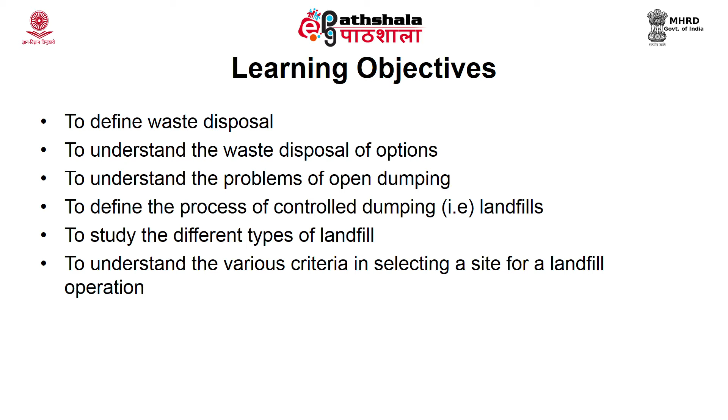As I told you earlier, disposal is the last step in the waste management plan. This is where the fate of solid waste ends. Ultimately, any solid waste generated ends in a disposal site, either directly disposed into the landfill after generation from the collection site, or it undergoes treatment or processing, and later the residue left after treatment is taken to the disposal sites.

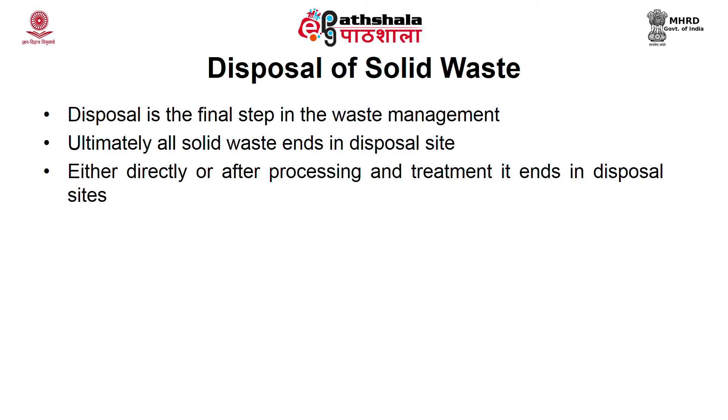In a country like India, we always practice open dumping. The waste generated from the collection area is taken up by waste collectors and then disposed of into an open area which does not have any protection. Protection in the sense that the environmental matrices are disturbed; it pollutes the water, soil, air and creates various other problems.

So in most developing and underdeveloped countries, solid waste is dumped in open land without any protection or environmental control. That sort of dumping is called unsafe dumping. Solid waste is also disposed of in water bodies. In recent times you can find a lot of problems with marine pollution, where a huge amount of plastics are disposed of and found in the oceans. Marine pollution is one important issue gaining a lot of attention.

Solid waste, as I told you, is also disposed of in water bodies. Whenever you visit a tourist place, you can see a lot of material littered and just thrown into the water bodies. So people also use these water bodies as a source or as a disposal site.

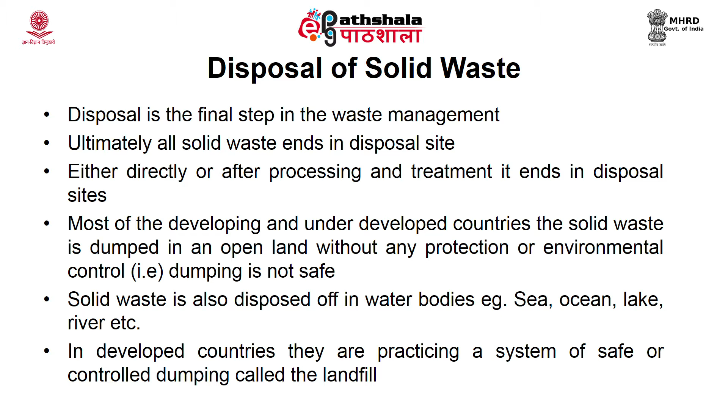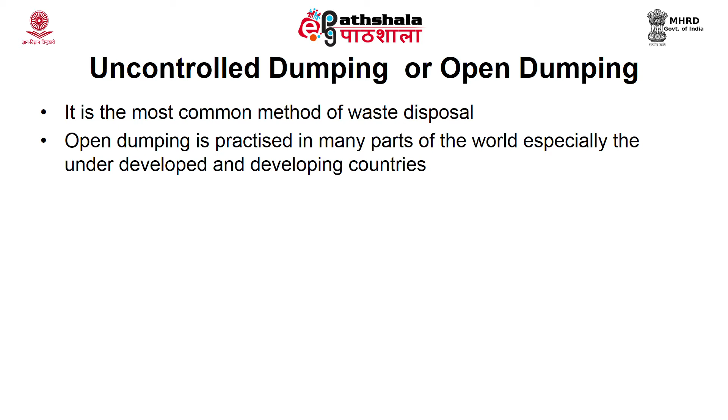On the other side, in developed countries, they practice a system of safe or controlled dumping, which is called a landfill. Uncontrolled dumping or open dumping is the most common method followed for waste disposal, practiced in many countries, mostly underdeveloped and developing countries. In this method, waste is dumped at a designated site or land without any environmental protection or control.

The waste disposed in open areas remains there for a long period of time and starts affecting the environment, and slowly it also affects the health of individuals. Due to the various problems associated with open dumping, landfills came into picture because they are considered a safe option where waste is contained with proper protection mechanisms, or in other words, contained by a barrier system, so that water, air and soil do not get polluted.

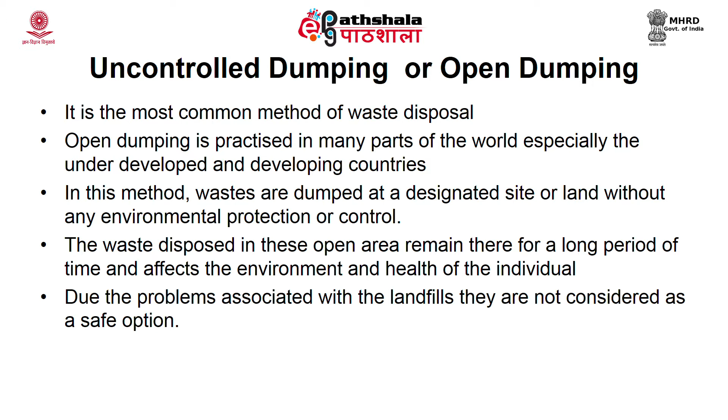Now let us look into the various problems associated with open dumping. First, it causes contamination to soil, water and air.

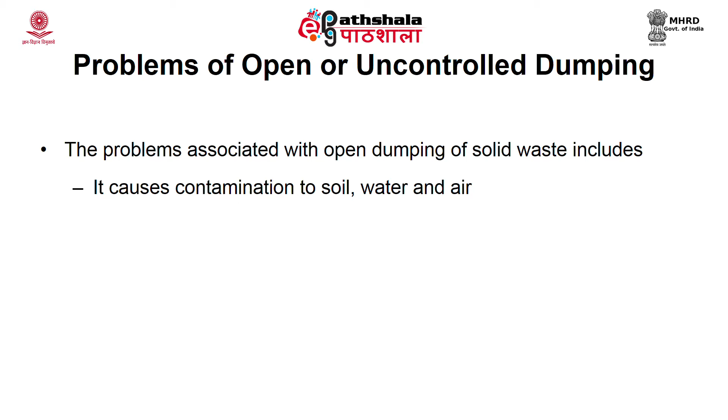During uncontrolled dumping, leachate, which is a watery liquid that oozes out of a material during degradation, percolates into the soil. When it percolates into the soil, the contaminants or pollutants enter it. These contaminants may or may not be toxic, and it also affects the microbial diversity of the soil and the vegetation of the area.

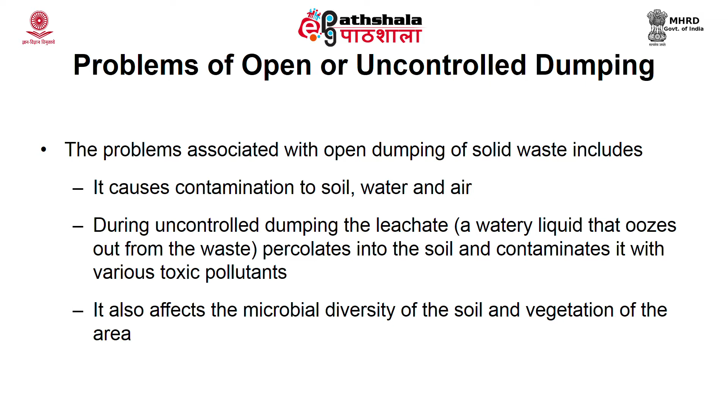Wherever you see these dump sites or dumping areas, you cannot find any vegetation. Hardly any vegetation is seen, and what is there is sparsely vegetated. Through the soil medium, the leachate further percolates and infiltrates, and finally reaches the groundwater, thereby contaminating it.

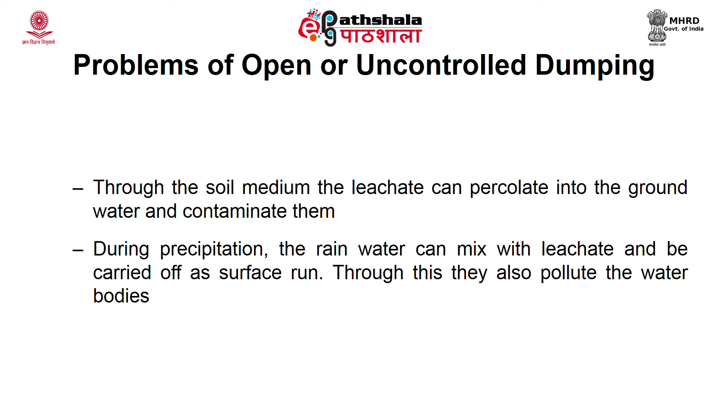Now when there is rainfall, what happens? The water reaches the surface and mixes with the leachate generated by the waste. Once it gets mixed, a surface runoff is created, and through this way it is discharged or enters into water bodies. So during precipitation, rainwater can mix with leachate and be carried off as surface runoff, polluting other surface water bodies.

The next problem generally faced is that these open dumps serve as breeding grounds for many disease-causing vectors. Since the waste has been piled up, you can find a lot of flies, mosquitoes and other rodents, which are the main carriers. They can cause malaria, dengue, and other diseases.

Even stray animals get into these waste piles and can also act as carriers. Stray animals can be dogs, pigs, cows and many more. They also act as carriers, and when they enter the dump sites and then come into the residential area, they bring the vectors along and spread diseases there.

Since the waste dumped in the open area does not have any cover or capping, it is carried off by the wind. When there is wind blowing, it carries all the loose materials from the waste pile and keeps spreading or travelling through long distances. It can come back to the residential area, or even sometimes get stuck to vehicles, the glass or front mirror of the vehicles, and also stick onto traffic signals.

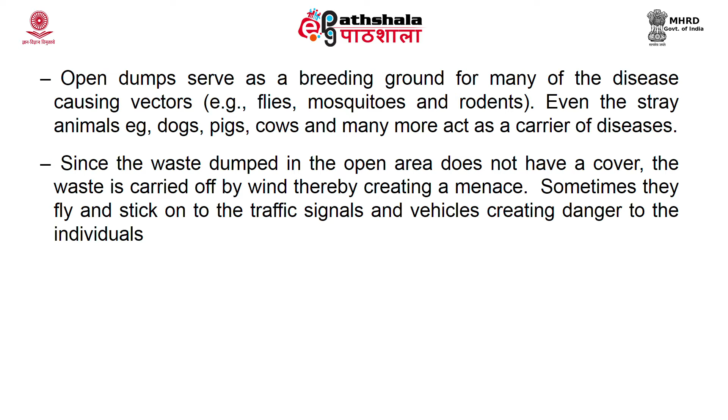Due to this, there are chances of accidents occurring, and it is dangerous for the individual. To recover metals from the waste pile, it is difficult for rag pickers, so what do they do? They light fire on these waste piles, and once it burns and gets converted into ash, they remove the valuable metals from that.

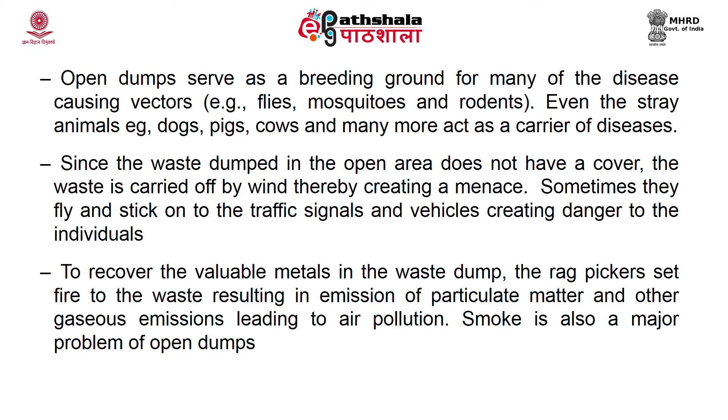Since they do that, it results in emission of particulate matter as well as gaseous pollutants. So to recover valuable metals in the waste dump, rag pickers set fire to the waste, resulting in emission of particulate matter and other gaseous pollutants, leading to air pollution. Smoke is also a major problem caused in open dumps due to the fire set by these people, so by this way also the air is being contaminated.

In addition to that, when the waste gets degraded, it also generates or releases a lot of gases like carbon dioxide, methane, and VOCs, that is volatile organic compounds, which also cause air pollution. So air pollution is also caused by emission of gaseous pollutants, for example carbon dioxide, methane, VOCs, etc., produced during waste degradation. The emission of greenhouse gases from these dump sites results in global warming.

The land where the waste is dumped undergoes continuous degradation, and at one point of time the land gets deteriorated and is of no further use.

The waste dumped in open dumps creates unpleasant odor. Whenever you cross by a waste dumping area, or even a vehicle collecting waste, you get that obnoxious smell which is very unpleasant. So such odor is also released from these areas.

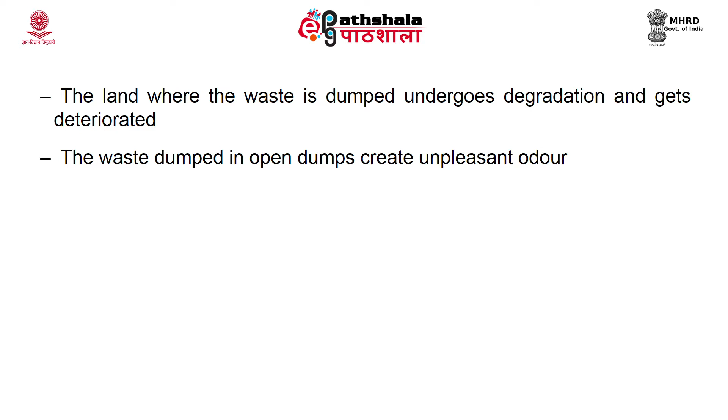Now, in general, if you see the aesthetics of the area, nobody would like to see an area where waste is being dumped, because you can find a lot of flies, mosquitoes, and animals moving around these dump sites. So it does not give a proper aesthetic look. These dump sites affect the aesthetic look of the area.

As I told you earlier, these waste dumps or piles attract a lot of insects, rodents, birds and animals. The contaminants present in these waste piles are toxic, which affects the species, and sometimes they also kill the insects, birds and animals. Through these insects, birds and animals, the toxic contaminants enter into the food chain and slowly reach human beings, causing a lot of health issues.

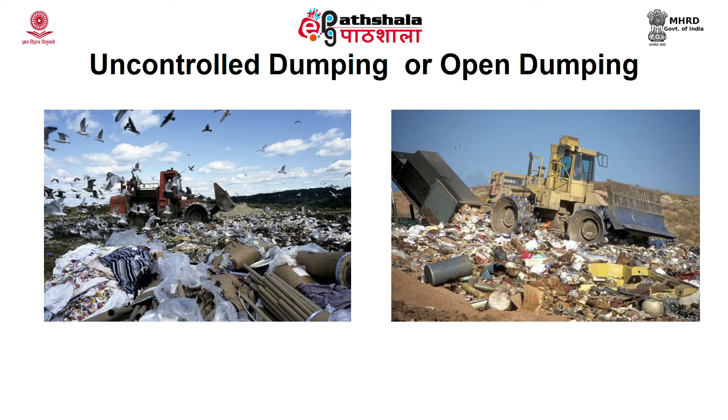This picture shows how in a dump site you can find a lot of birds sitting over these open dumps, and on the right side you can see how a lot of material is being dispersed into the open landfills.

So far we have discussed the various problems you face out of open dumping, that means the waste is just thrown off into open land. Now, with these problems, people thought we should have some sort of controlled dumping which should be safe for the environment as well as individual health. So with that, the concept of controlled dumping or landfilling originated.

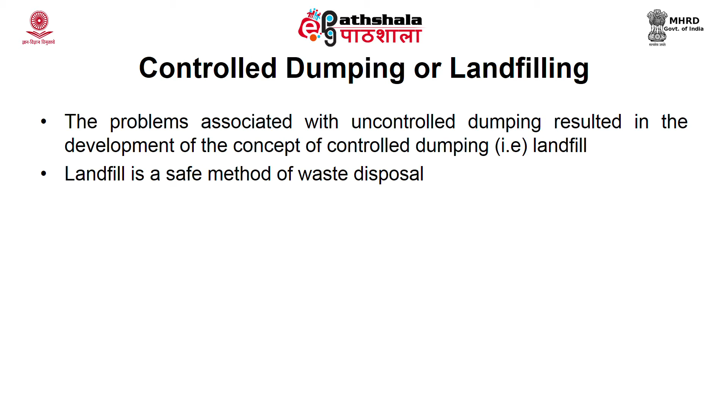The problems associated with uncontrolled dumping resulted in the development of the concept of controlled dumping, that is a landfill. Landfill is a safe method for waste disposal, defined as an engineered structure where waste can be contained in a safe manner. They are designed and operated to meet the standards laid by the government, in a way that protects the environment and health of people.

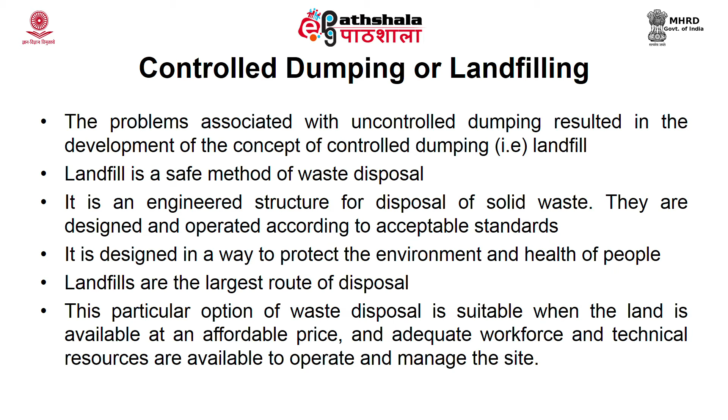They say landfill is the largest route of disposal. This option of waste disposal is suitable when land is available at an affordable price, when you have adequate workforce and technical resources. If all these conditions are there, then landfill will be the cheapest option.

Now, what are the different components of a landfill? As I told you, landfill is an engineered structure which has a lot of barrier systems, so that it contains the waste and does not allow the contaminants or pollutants to leach out from the landfill.

There are three major components of a landfill. One is a liner system, the other is the waste emplacement cells - emplacement means placing or loading the waste. The third one is a cover or cap, the final closure. When the landfill is full, it has to be closed, called landfill cover or capping.

The leachate collection system, groundwater monitoring system and methane gas monitoring system are for monitoring the landfill. The leachate collection is needed because during waste degradation, the leachate that comes out should be collected, otherwise the water gets accumulated and affects the site. So the leachate has to be collected out from the landfill site.

The groundwater monitoring system and methane gas monitoring system are for post closure. Post closure means once the landfill is done, with no further space to accommodate waste, you have to close or seal the landfill. After that, you have to keep monitoring it continuously for 5 to 10 years, so you can identify any leakage through these groundwater and methane gas monitoring systems.

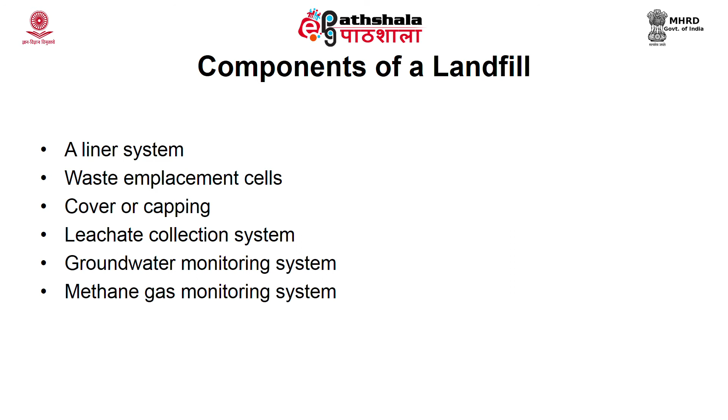The details of these components of a landfill we will discuss in the next module. This is an image of a landfill where you can see it is a well-engineered structure. You can find the barrier system both on the sides and at the bottom. You have a liner system, and the waste is placed in terms of cells, and once a cell is full, they move into the next cell.

They keep on doing it like that, and you can see how on top it is covered by a soil layer. You can find the groundwater monitoring system and leachate pump or collection system for collecting the leachate, so that it does not enter into the groundwater, and you also have a gas monitoring system. Now, this is how a landfill will look like.

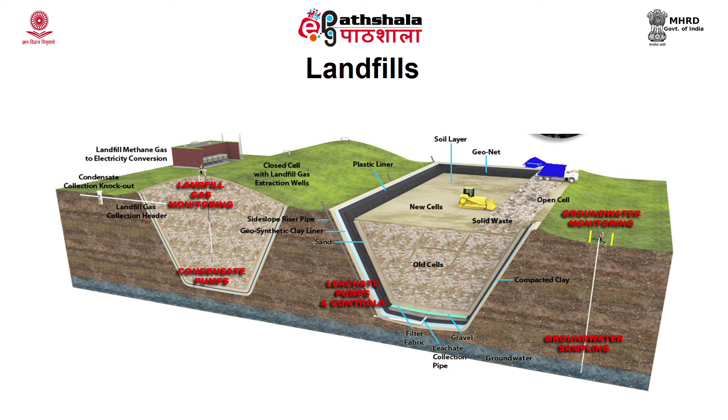So far we have discussed the open dumps and the landfills. Now we also have to look into the various criteria required for selecting a site for a landfill. Though it is an engineered structure where you contain the waste with a barrier system to protect the environment, still there are certain conditions to look into while selecting a site. The selection of a landfill site depends upon the following criteria.

One, the proximity of the site to the source of waste generation, the distance from the boundary of the site to residential area, agriculture, or urban site. This means the waste site should not be close to a residential area, agriculture area, or urban site. It should always be located on the outskirts of the city, away from the city. But though located on the outskirts, it should still be accessible, with proper road connectivity and good transport infrastructure.

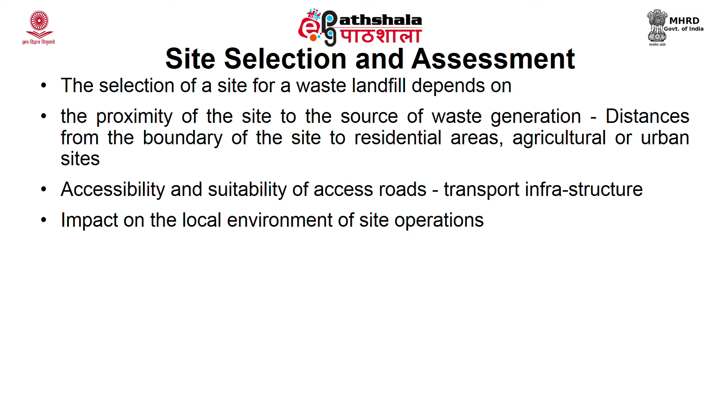Then the impact on the local environment. When you select or allocate a site for a landfill, you should understand and study how the landfill is going to affect the local environment around it.

Next, you should also consider the geological and hydrogeological stability of the site. These sites should not be located in a place where there are chances of frequent flooding, landslides, or avalanches. Such areas should be avoided.

The assessment of soil characteristics is very important, because it is through the soil that the leachate percolates. So you also have to focus on soil characteristics - the mineralogy, the permeability of the soil, and the grain size of the bedrock. If you understand all these things, it will help you decide, design, and structure the landfill so that it does not cause any pollution.

Then hydrological isolation. Hydrological isolation means it should be away from the water body, whether groundwater or surface water - the site should be isolated from these water bodies.

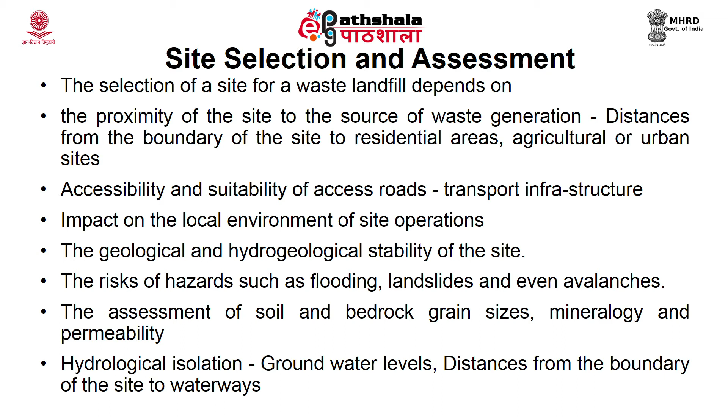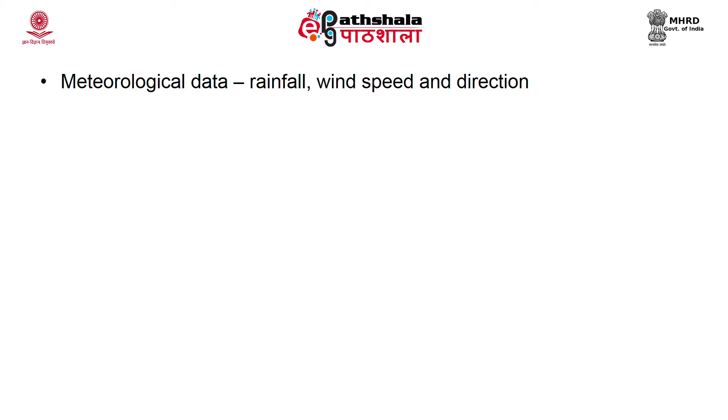Next, you should also consider the meteorological data - the amount of precipitation in that particular area, or the rainfall the place gets every year. You should also consider the wind speed, its direction, and other data.

When you select a site, you should also perform a topographic survey. This will help determine the slope, the elevation, and whether the terrain is rugged or undulated. So a topographical survey is undertaken to calculate the available void space and therefore the waste capacity of the site.

The background levels of water and air quality should also be assessed to find out the long-term impact of the site. For example, if you have this data, after some time when the landfill is closed, if you find unusual changes in air and water quality, this will help you find out whether there is any leakage or problem in the landfill site. So you should always assess water and air quality before selecting a site for the landfill.

Apart from this, these landfill sites should not be located near a UNESCO heritage site, a monument, national parks, or wildlife sanctuaries. You should also not select land with good agricultural productivity. Even barren land which can be brought back to productivity should be avoided when selecting a site for landfilling.

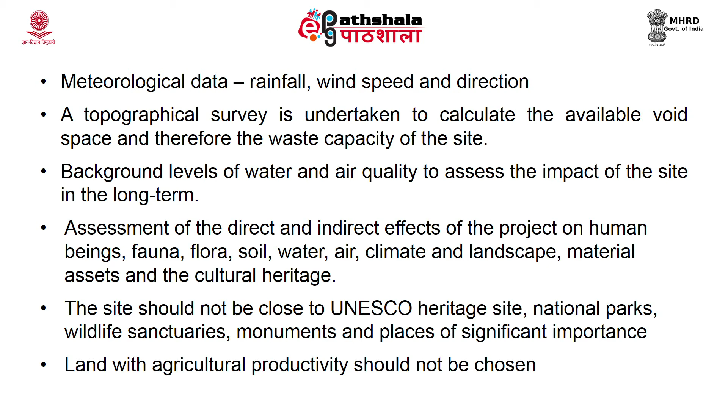Now let us look into the considerations for landfill. Since it is an engineering structure, you should consider the following criteria: one is site capacity, second is waste density, third is settlement, fourth is material requirement, fifth is drainage and operational practice. If you consider all these parameters, the construction of a landfill will be smooth.

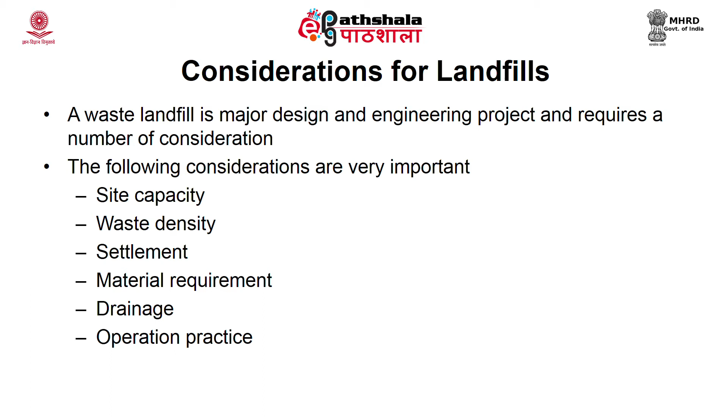Now, site capacity - this is one important factor when you design a landfill. Whenever you discuss capacity, the landfill should be able to accommodate waste for almost 30 to 50 years.

Now, this is called the design period. Within this period, when you calculate, the population projection and all should be considered, and the landfill site should be able to accommodate so much waste for 30 to 50 years.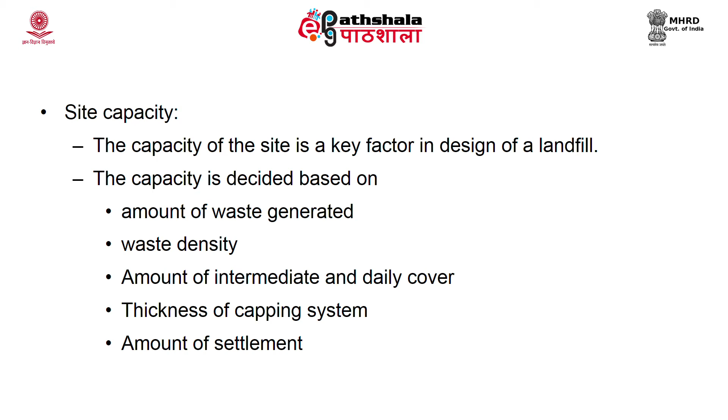The thickness of capping system and the amount of settlement also influences your site capacity. Settlement means due to compression, compaction and degradation, the volume of waste keeps reducing or it gets compacted. That is called the amount of settlement.

The next one is waste density. The density of the waste within the landfill will vary depending on the degree of pre-compaction of the waste before emplacement, variation in the components within the waste, extent of biodegradation, amount of daily and intermediate cover, and mass of overlying waste. Because the overlying waste, obviously, will be heavy, so it will press the waste lying below. The density also varies or is affected during the movement of trucks or lorries which carry the waste.

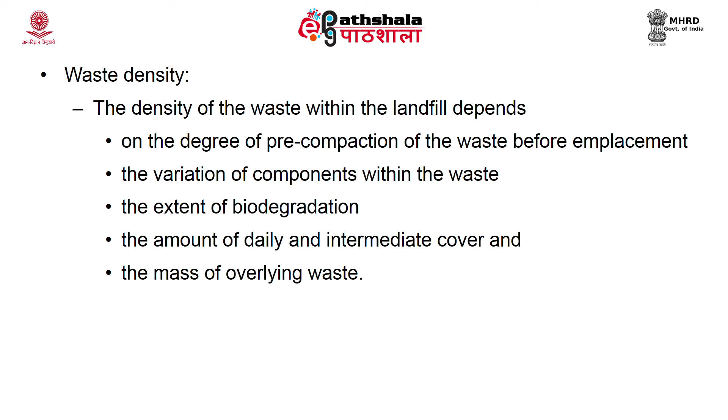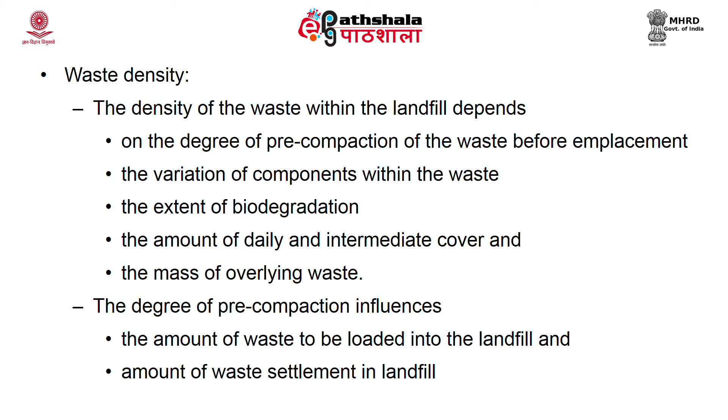The lorry is a heavy tired vehicle, and when it carries the waste it will be very heavy, and when it goes across these waste cells, obviously it will compact the waste and the volume gets reduced. So the degree of pre-compaction of the waste influences the amount of waste to be loaded into the landfill. It will also influence the amount of waste settlement in a landfill.

The density of the waste can range from 0.65 to 0.85 tons per meter cube. For some waste, it can go as low as 0.4 tons per meter cube or as high as 1.23 tons per meter cube. Inert waste like bricks, concrete, stones and all have a very high density, typically about 1.5 tons per meter cube. Now, the next consideration is settlement.

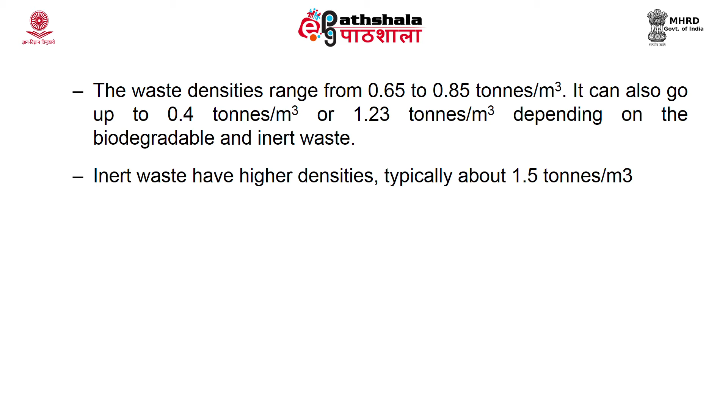Settlement of the waste in a landfill occurs due to physical alteration, physical rearrangement. That means, for example, if the waste is loose and has a lot of void space, slowly due to the weight of the overlying waste or when a truck moves over it, the void space automatically gets reduced. That is called physical rearrangement.

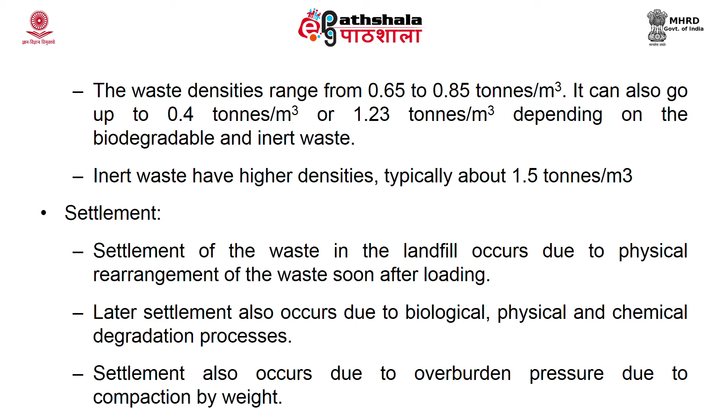So settlement can occur due to physical rearrangement or due to biological, physical or chemical degradation processes, which will also lead to settlement. The settlement also occurs due to the overburden pressure, which I told you a couple of slides before.

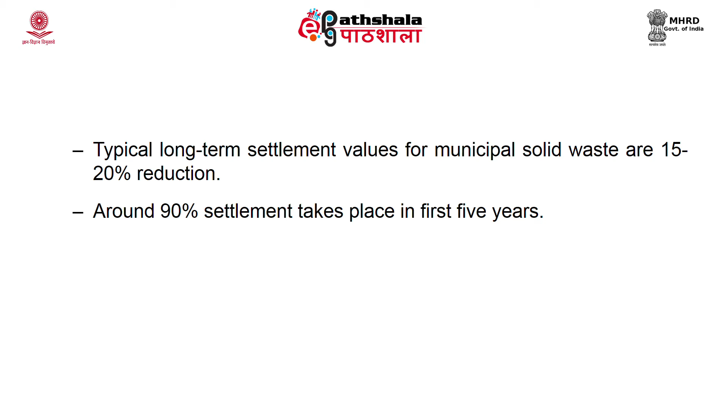The typical long term settlement value for municipal solid waste is 15 to 20% reduction. So once you load the municipal solid waste into a cell, you can find around 15 to 20% reduction in the long term. Overall, for the first 5 years, almost 90% of the settlement occurs. I am talking about municipal solid waste.

Now, the settlement takes place gradually and it goes up to 50 years, that is the entire design period. Now, inert waste shows very low settlement because their density is high, and also because they do not degrade, being inert material. So they show very low settlement.

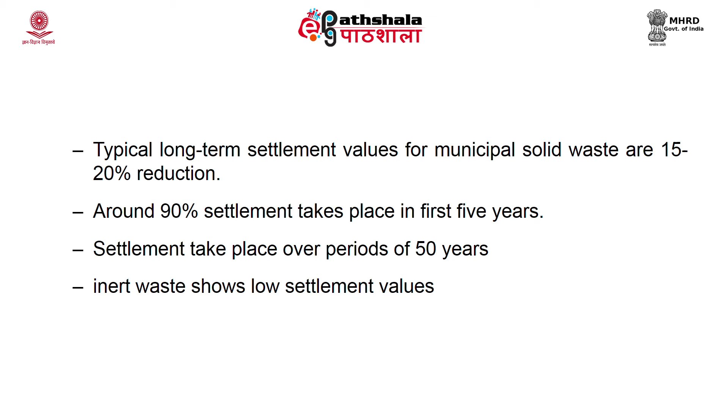Now, there are three main stages of settlement. One is initial compression, second is primary compression, and third is secondary compression. In initial compression, it is instantaneous, that is spontaneous, and it occurs due to compaction of void space. Any material cannot be said to be tightly packed, it can be loosely arranged.

So, more the compaction, the void spaces, the air space in between these particles will go off and it gets compacted. This actually occurs due to compression pressure from the overlying waste and the compaction vehicles. The second type of settlement is called primary compression.

This occurs due to the dissipation of pore water and gases from the void spaces, and they take usually 30 days. In secondary compression, it takes years. This is a very slow process and it mainly depends upon the biodegradation of waste. It takes years and occurs due to biodegradation of waste. During secondary compression, you can find the generation of leachate as well as gas, which will also reduce the mass and volume of your waste.

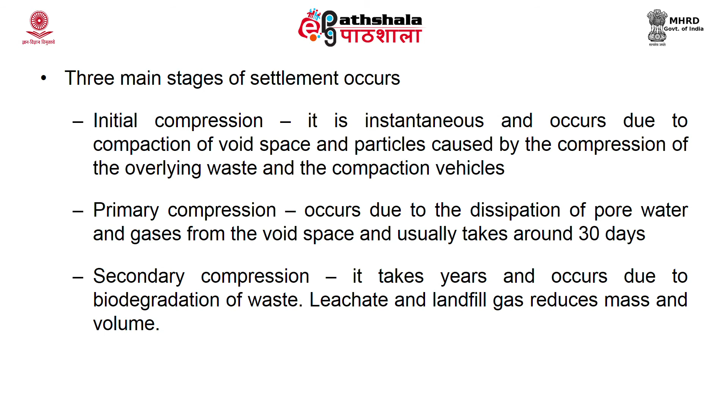The amount and rate of landfill settlement will depend on different factors. One is the initial void volume of the waste. It will also depend upon the compaction of the waste and the thickness of the waste. Normally, deeper landfills show a faster rate of settlement.

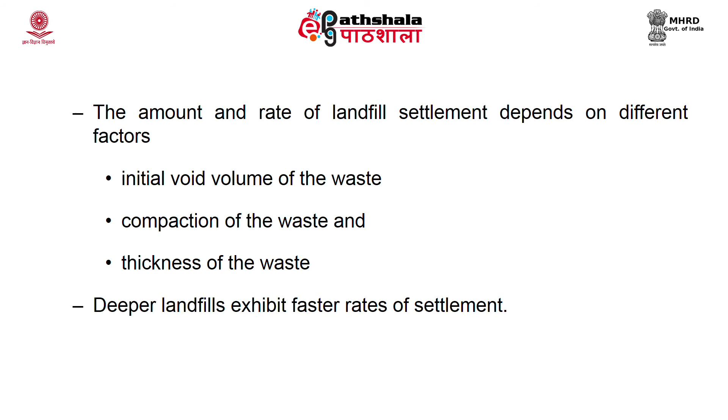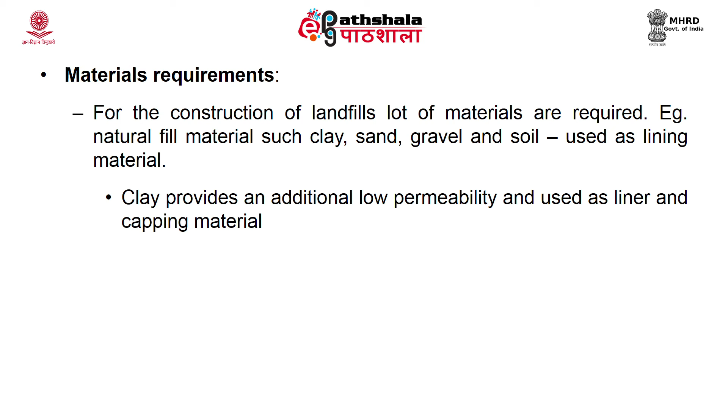The next consideration is material requirement. For construction of a landfill, you require a huge amount of material, be it natural or synthetic. Natural fill material includes clay, sand, gravel, and soil, which are usually used as lining material. Clay is the most popularly used lining material because of its low permeability.

Gravel is used for drainage and for leachate collection. Clay is also used as a capping material and for restoration of soil. The availability of such material on site will reduce the cost and increase the ease of operation.

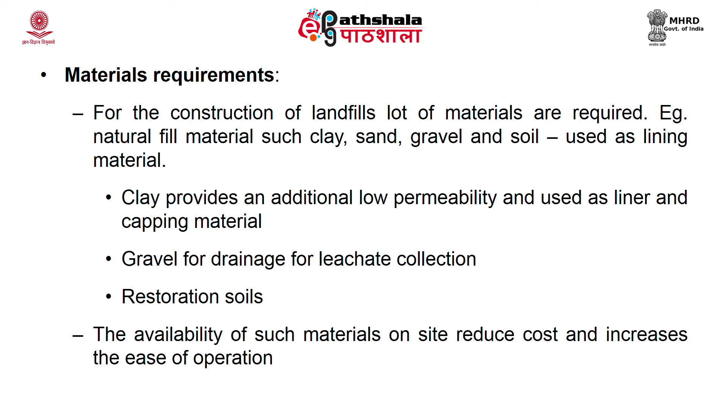On the other side, if these materials are not available, you have to spend a lot of money importing or transporting them, which will increase your cost. So, if the materials are available in or near the site, that will reduce your cost.

The material is also required for daily cover. Apart from the lining or liner system, these materials are also required for daily cover. Daily cover will protect from wind-blown litter, avoid insects and rodents burrowing into it, and also avoid scavengers, fires, and odor.

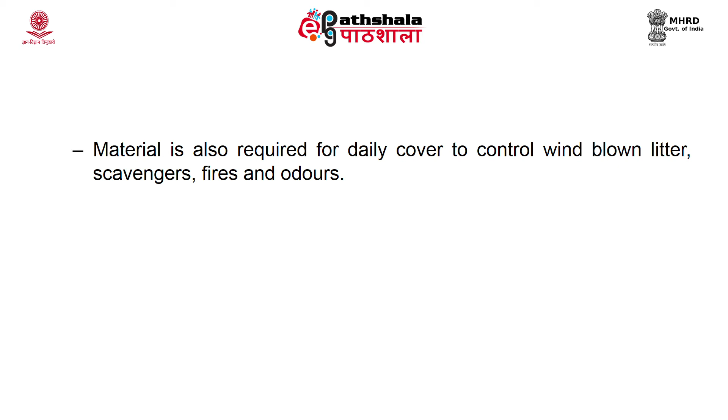It is not only soil material that can be used as daily cover, even garden waste or some alternative materials like reusable blanket material and other inert waste can also be used as daily cover.

The negative side of daily cover is that every time you spread one layer of cover over the waste material, it will occupy landfill space, thereby reducing the operating time or design period of the landfill. That means you would have designed the waste loading for a period of, say, 30 years only for the waste generated or brought to the disposal site. Now, if you keep using a daily cover to cover the waste, it will add on and reduce the lifetime of the landfill.

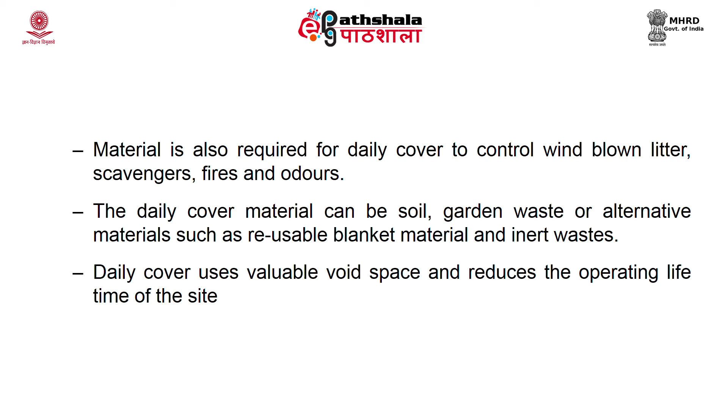Drainage is another important factor that needs to be constructed when you build a landfill. The excessive water received during rainfall should be avoided from entering or infiltrating into the waste, because when it enters, it will mix with the leachate and result in generation of more leachate, which will get washed off or infiltrate. So that has to be avoided.

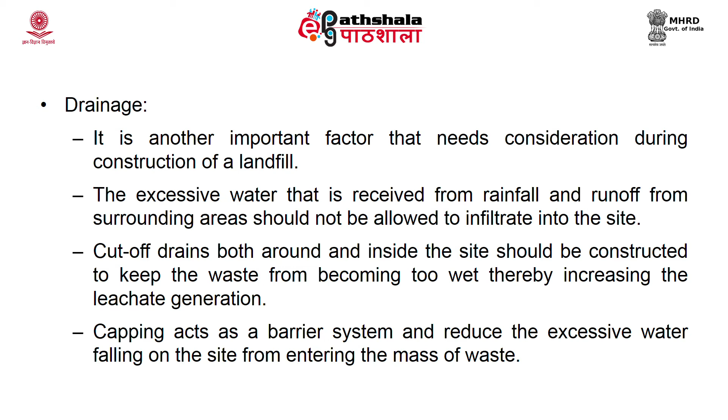This can be avoided by constructing cut-off drains both around and inside the site, so that the water can be drained off and the waste will not be wet. Cut-off drains around and inside the site should be constructed to keep the waste from becoming too wet, thereby increasing leachate generation. Also, the capping system, the final cover which acts as a barrier system, will prevent the waste from getting into contact with rainfall, and also prevent rainwater from entering into the waste.

The last consideration is the operational practices. When you talk about operational practices, you should consider traffic movement, cover material storage, laying, security - all these things when you build a landfill. The typical modern landfill site consists of a secure, fenced, and landscaped site with a proper access route for transport vehicles. So all these operational practices should be taken into account when you construct a landfill.

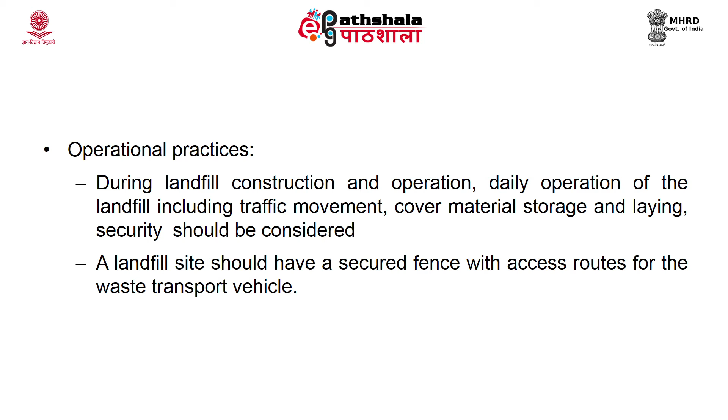Now, let us look into the types of landfill. There are three types of landfill.

One, a landfill for containing hazardous waste, also called a secured landfill. The other one, for non-hazardous waste such as municipal solid waste, is called a sanitary landfill. Then there is also a landfill for inert material. So these are the three types of landfills.

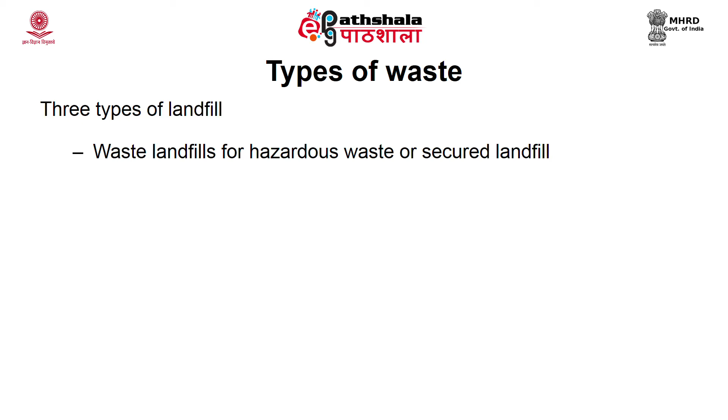Now we look into the hazardous waste or secured landfill. Hazardous waste is defined as any waste that is dangerous for storing, difficult or dangerous to treat, or dangerous to dispose of. A material is called hazardous if it possesses one or more properties: corrosivity, reactivity, ignitability, and toxicity. In short, you call it CRIT.

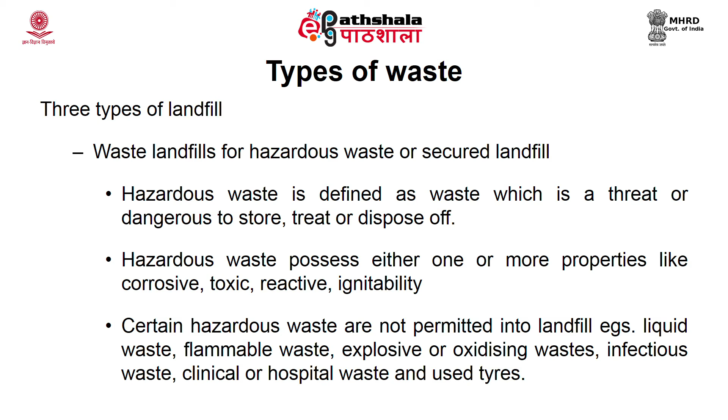Certain hazardous wastes are not permitted into these landfills. Examples include liquid waste, flammable waste, explosives, oxidizing waste, infectious waste, clinical or hospital waste, and used tires. They are all not allowed to be disposed of along with the hazardous waste.

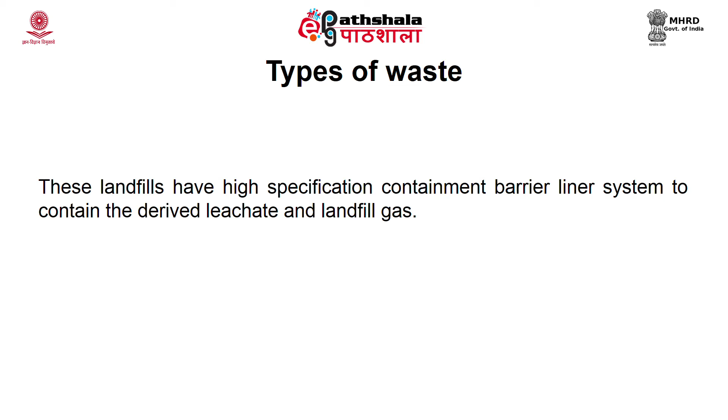These landfills have high specifications. For example, a hazardous or secured landfill should have a very good containment system. The barriers or liner system should be well designed so that the leachate or landfill gas does not escape and does not affect the environment.

The next type of landfill is for non-hazardous waste, also called a sanitary landfill. It is mainly used for municipal waste, and non-hazardous means any waste including municipal solid waste and a few industrial waste such as organic and inorganic waste, provided they are non-hazardous.

Stable, non-reactive hazardous waste can also be used, but in a solidified or vitrified manner, and deposited into the sanitary landfill. It is solidified or vitrified so that it does not cause leachate generation, and the leaching behavior becomes equivalent to the general category of non-hazardous waste.

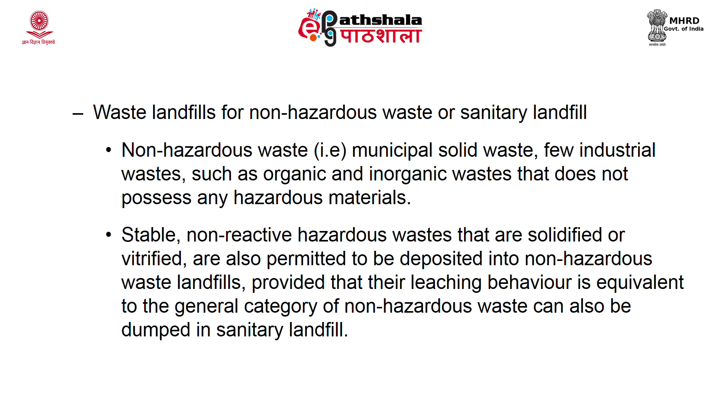The third type is the landfill for inert waste. Inert waste is defined as any waste that does not undergo any significant physical, chemical, or biological transformation. It does not dissolve, burn, degrade, or react physically or chemically, and does not give rise to any form of pollution or harm to human health.

The total leachability and pollutant content of inert waste is highly insignificant. Examples of such waste are bricks, glass, tiles, ceramics, concrete, and stones. For this there is a specific type of landfill called the inert waste landfill.

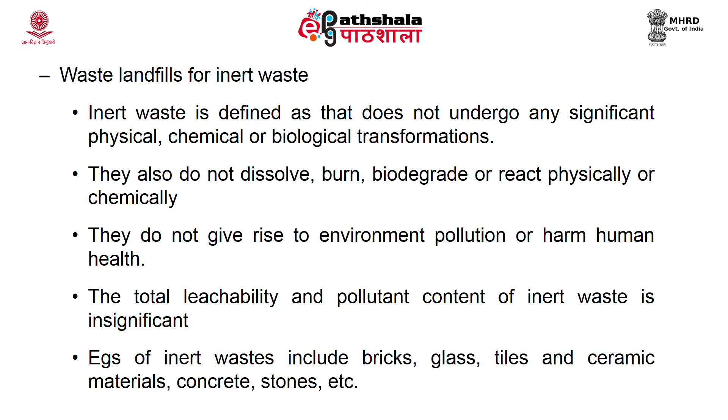At the end of this module, we have discussed what waste disposal is, and the different options available for waste disposal. We have also seen what type of waste disposal is practiced overall, as I told you, in developing and underdeveloped countries, which practice open dumping. Open dumping is nothing but disposing or throwing off waste in an open area without any environmental protection.

There are a lot of problems associated with open dumping, which are very harmful and affect the health of an individual as well as the environment. Based on these problems, the concept of controlled dumping evolved. Controlled dumping is nothing but landfilling, where waste is contained in an engineered structure and stored in a safe manner, so that it does not affect the surrounding environment or cause health hazards.

Later, we also defined and looked into the various components of a landfill, like the liner system, the waste emplacement cell, and the landfill cover. I also briefed you about the groundwater and landfill gas monitoring systems, which we will discuss in more detail in the upcoming modules.